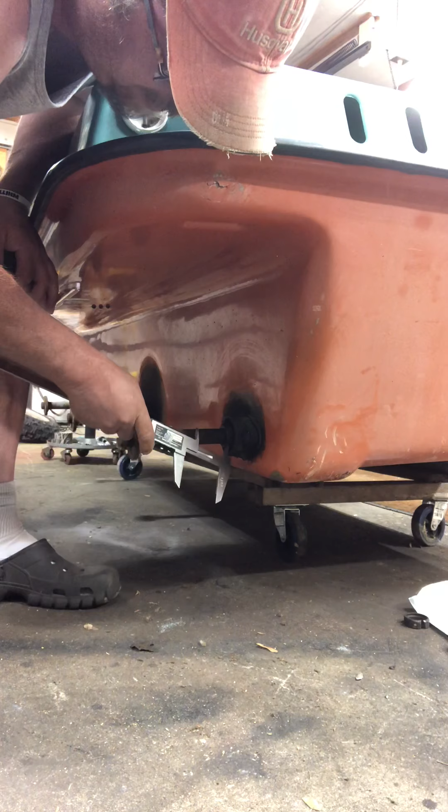So what I'm going to do now is take a measurement from the back face of the wheel flange to this keeper right here, or collar.

And that measurement will be the same on every single axle. That's a factory measurement. So that measurement is 6 inches.

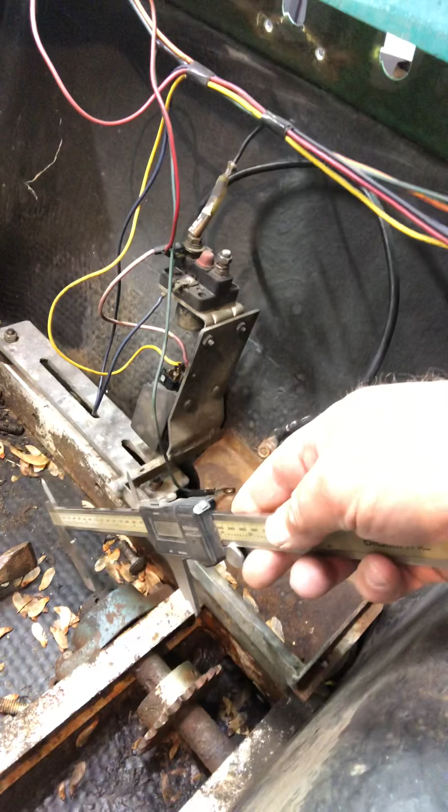So now I go to the inside of the machine, and I think what I can do is take these measurements once I get the axle shaft in at the correct measurement, get the outer bearing and the keeper in place, get those mounted, and slide the shaft in. Then I can take measurements from the end of the shaft here to the sprocket, and that'll have me at the correct distance for each axle.

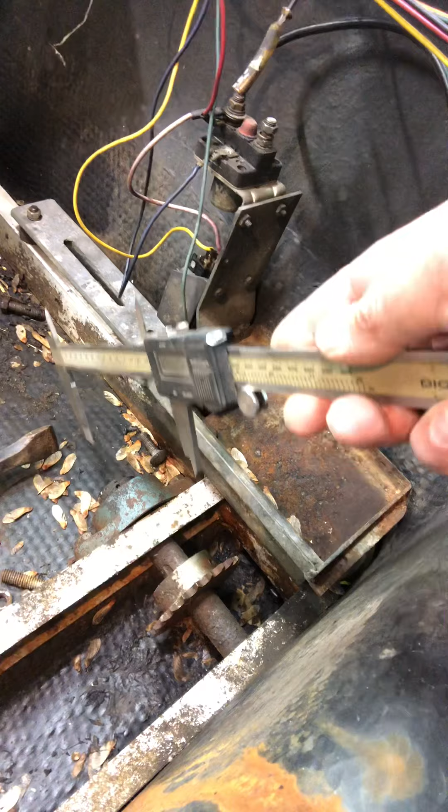And then it's just a matter of bolting the bearing on, and the keeper falls where it may. So the critical measurement, I think, is the outside measurement and where this sprocket is, so the chains run in the right orientation. So let me see here.

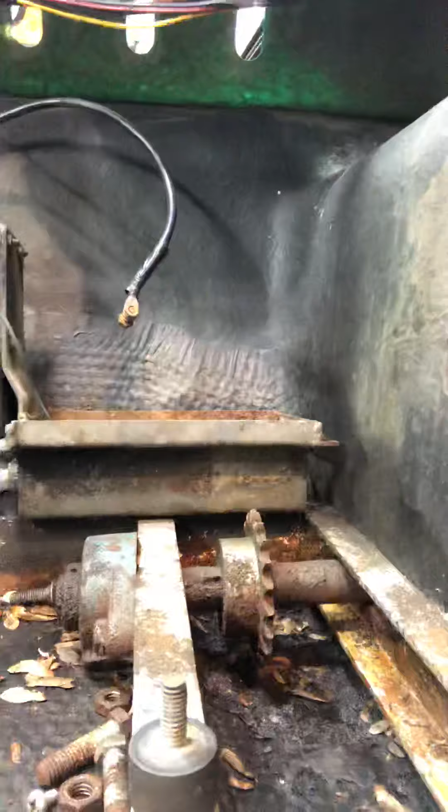I can't see me doing that. Let's see if I can do this. I don't have a tripod or anything out here today. I should. Because this is sucking balls.

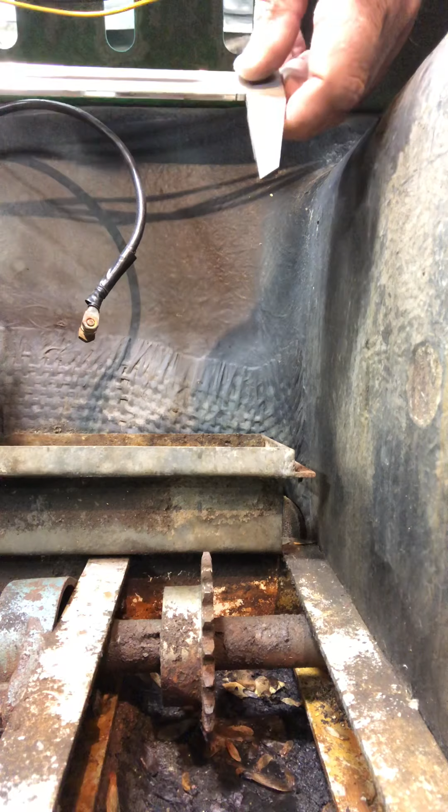There we go. Alright, so I'm going to measure from the outside of the end of the axle shaft to the inside — no, actually to the outside of the sprocket.

Because the next, all the sprockets down in line, they all meet up on this one line. There's a double sprocket right behind you now, and that outer edge all has to line up in a row. So taking this measurement from the outboard side of the sprocket to the end of the axle shaft will tell me where to put this and the double roller sprocket.

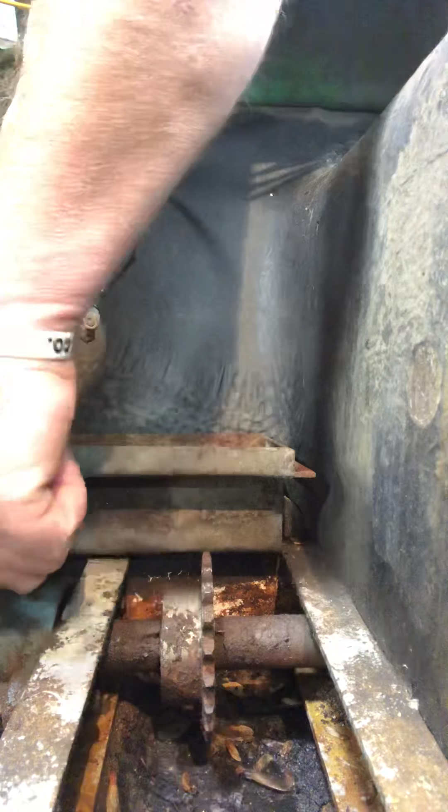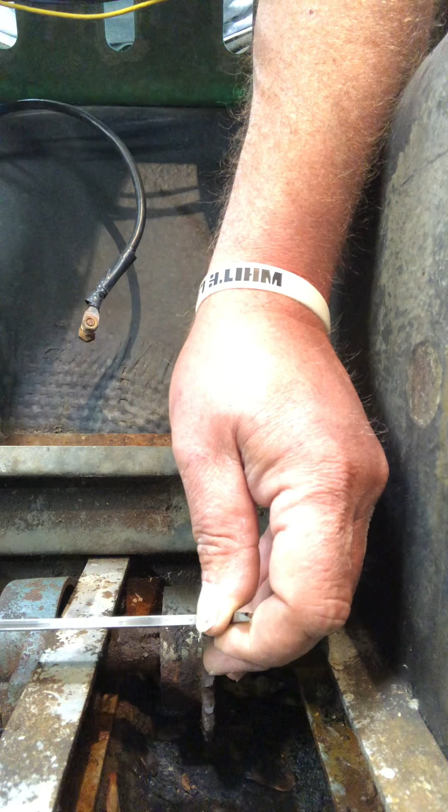So that is, wow, that's a weird measurement. Make sure I got all the shit off of the end of there. It's about 4.8 something. Four and 7/8.

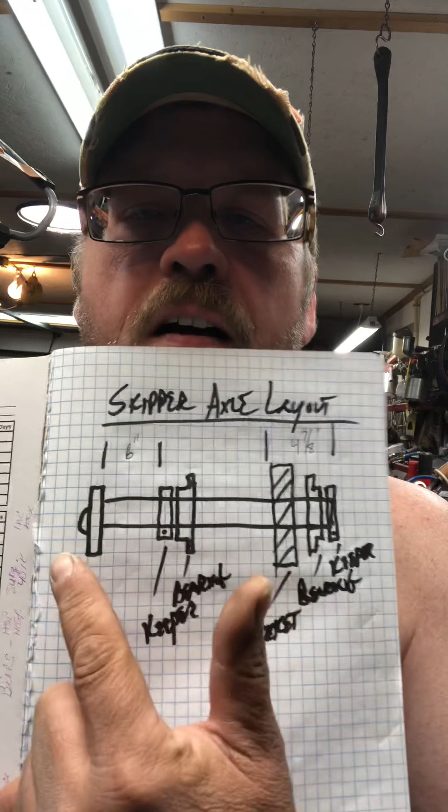So those should only be the two measurements I really need. Everything else will be where it will be. So if you look at this, here's where the wheel mounts. So the distance from the inside of that wheel flange to the outside of this keeper, or this collar, this lock collar, that keeps the axle from sliding left or right.

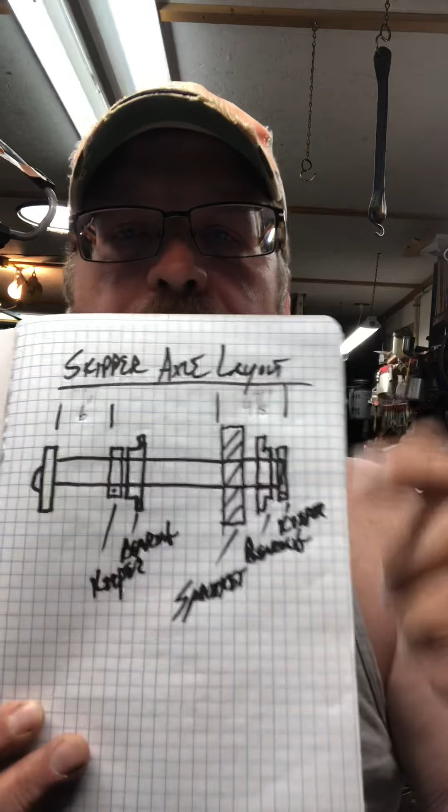That distance is critical, so that's at 6 inches. Everything from that point, the bearing obviously has to go right tight to the collar, which then will bolt to the tub and the frame.

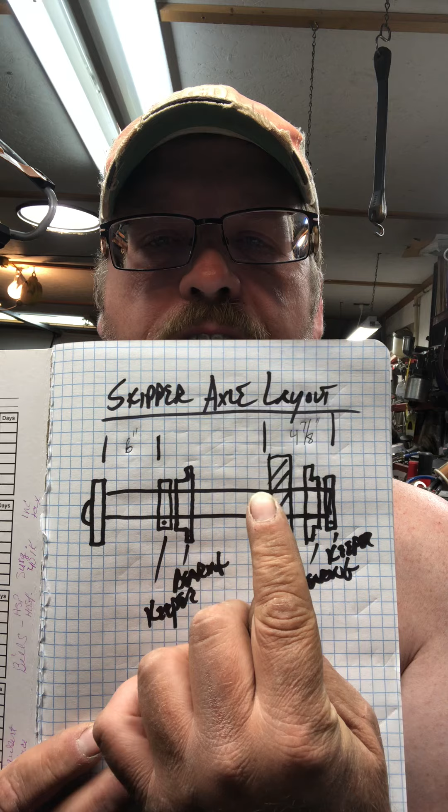And then the next critical distance is from the end of the axle shaft to the outboard side, or the outer edge of the sprocket. Now, there's also a double roller sprocket, but on the double roller sprocket, one of those sprockets always has to line up. Why can't I get this off of here?

Always has to be in a row like that. Okay, so one set of chains, it doesn't matter, just as long as the outboard side is the same for this sprocket on the shaft as this sprocket on the rear. This is on the middle shaft, middle axle. This sprocket is on the front and on the back, because here's where the engine connects.

So as long as this measurement here, from here to the outside of the tub, or actually what I'm doing is measuring from here to the end of the axle shaft — as long as that's the same on all 6 axles, the chain will be lined up dead on.

So that was pretty painless, but that's something I should have thought of doing in the first place, and I didn't, and now I have it. So once I get everything tore apart and put it all back together, I'll be able to reference that, because I know I will forget.